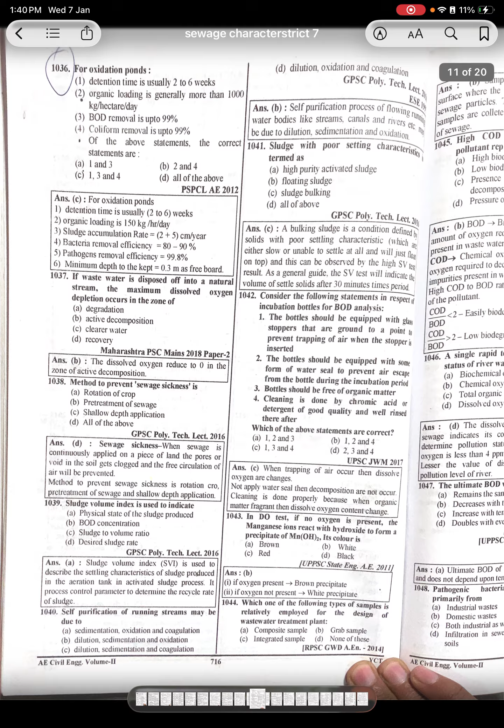Let's talk about the next. For oxidation pond, the detention time is usually 2 to 6 weeks. Organic loading generally more than 1000 kilogram per hectare per day. BOD removal up to 99%. Coliform removal is up to 99%. Which of the above statements is correct?

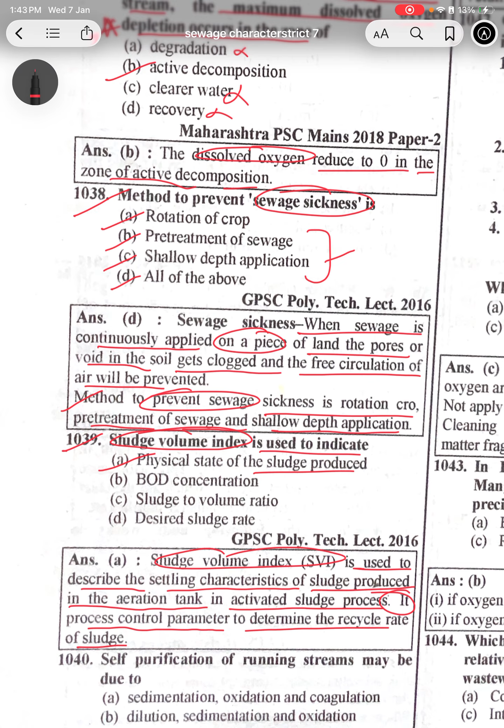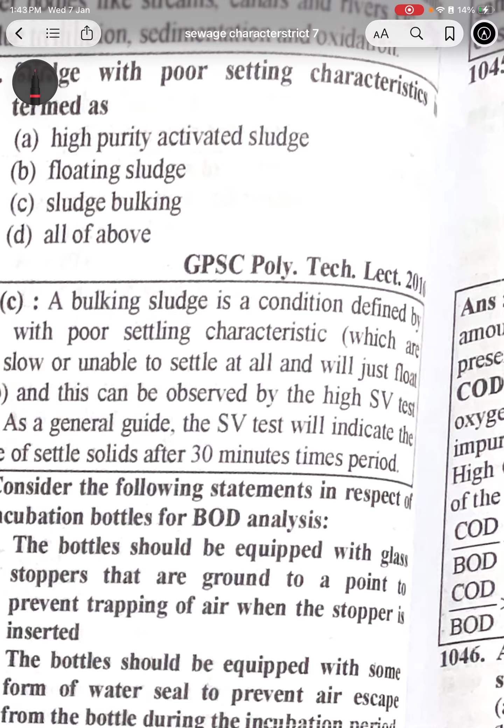Self purification of the running stream may be due to sedimentation, coagulation, and dilution, or dilution, sedimentation and oxidation. So the answer is dilution, sedimentation and oxidation. Self purification process of flowing water bodies like streams, canals, rivers, etc. may be due to dilution, sedimentation and oxidation.

Sludge with poor settling characteristics is termed as sludge bulking. A bulking sludge is a condition defined by solids with poor settling characteristics, which are either slow or unable to settle at all and just float on the top. This can be observed by a high SV test result. As a general guide, the SV test will indicate the volume of the sludge solids after a 30 minute time period.

Let's talk about 1042. Consider the following statements regarding the incubation bottle for BOD analysis. The answer is C. Let's see how. The bottle should be equipped with a glass stopper that is ground to a point to prevent trapping of air when the stopper is inserted. The bottle should be equipped with some form of water seal to prevent air escape from the bottle during the incubation period.

This won't be it. The bottle should be free from organic matter, absolutely right. The cleaning is done by chromic acid or a good quality detergent and well rinsed thereafter. When trapping of air occurs, the dissolved oxygen is changed. If the water seal is not applied, decomposition does not occur properly. Cleaning is done properly because if organic matter is present, the dissolved oxygen content is changed.

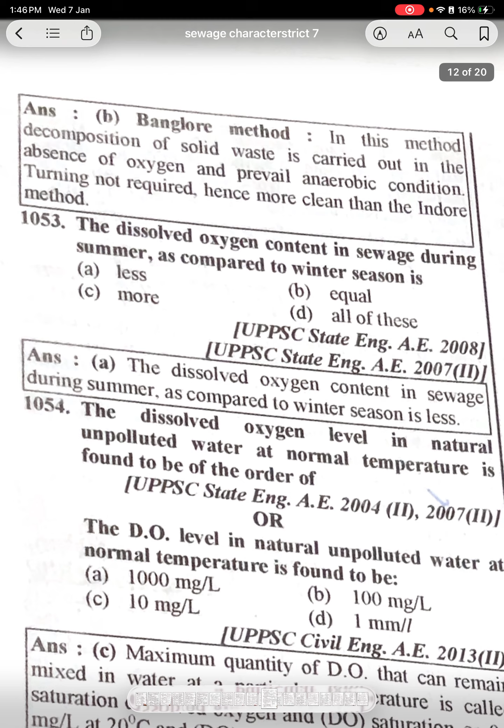Which of the following types of sample is generally employed for the design of a wastewater treatment plant? That is a composite sample. The answer will be composite sample. Let's talk about the Bangalore method. In this method, decomposition of the solid waste is carried out in the absence of oxygen and anaerobic conditions prevail. Turning is not required, hence it is cleaner than the Indore method.

The dissolved oxygen content in sewage during the summer as compared to the winter season is less. The dissolved oxygen level in natural unpolluted water at normal temperature is found to be of the order of 10 mg per liter.

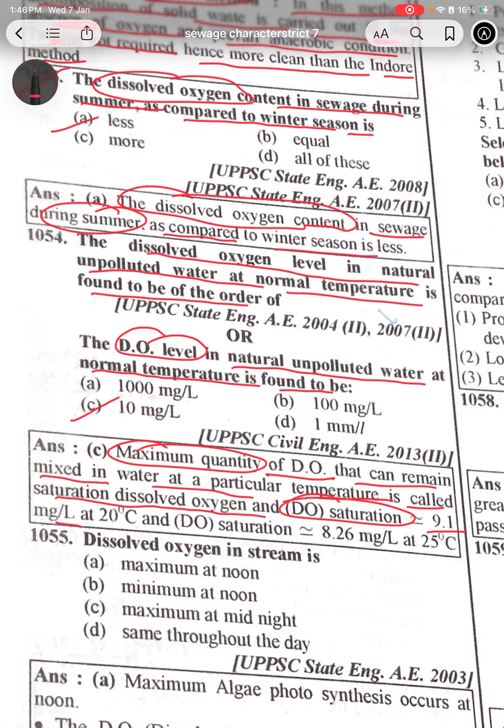The maximum quantity of dissolved oxygen that can remain mixed in water at a particular temperature is called saturation dissolved oxygen. Saturation dissolved oxygen is 9.1 mg per liter at 20 degrees centigrade and 8.26 mg per liter at 25 degrees centigrade. The dissolved oxygen in a stream is maximum at noon.

The maximum algae photosynthesis occurs at noon. The dissolved oxygen content in water is generally determined by the Winkler method, an oxidation-reduction process carried out chemically to liberate an amount of iodine equivalent to the quantity of dissolved oxygen originally present. The maximum quantity of dissolved oxygen that can remain mixed in water at a particular temperature is called saturation dissolved oxygen: 9.1 mg/L at 20°C and 8.26 mg/L at 25°C.

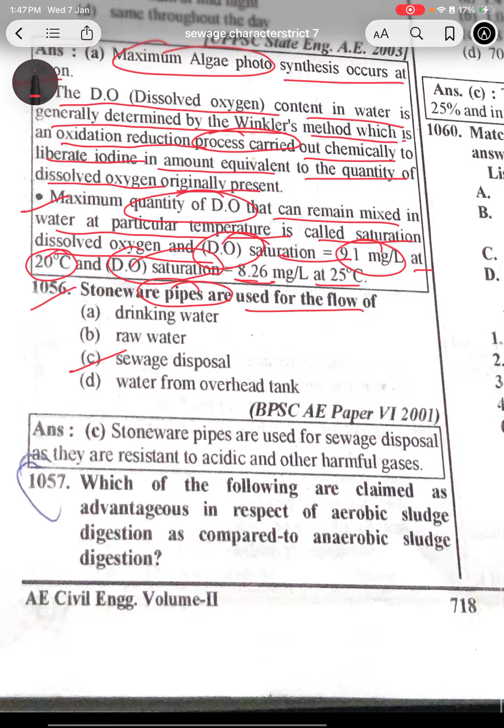Stoneware pipes are used for the flow of sewage disposal, as they resist acid and other harmful gases.

Which of the following chemicals are claimed as advantageous with respect to aerobic sludge digestion compared to anaerobic sludge digestion?

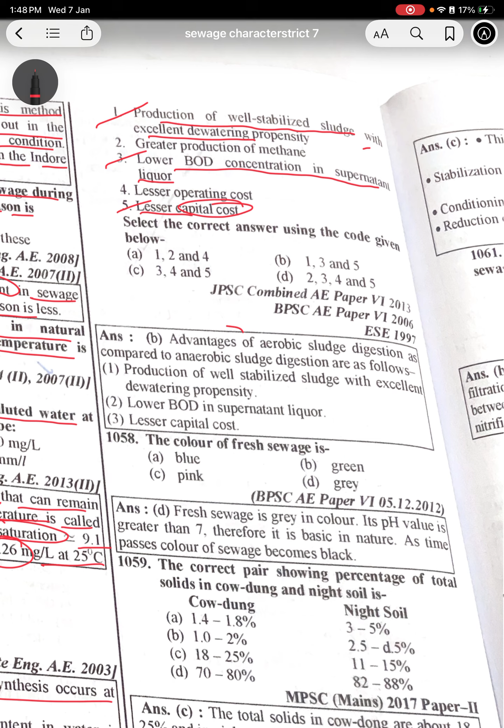Advantages of aerobic sludge digestion as compared to anaerobic sludge digestion are as follows: production of well stabilized sludge with excellent dewatering propensity, lower BOD in supernatant liquor, and lesser capital cost.

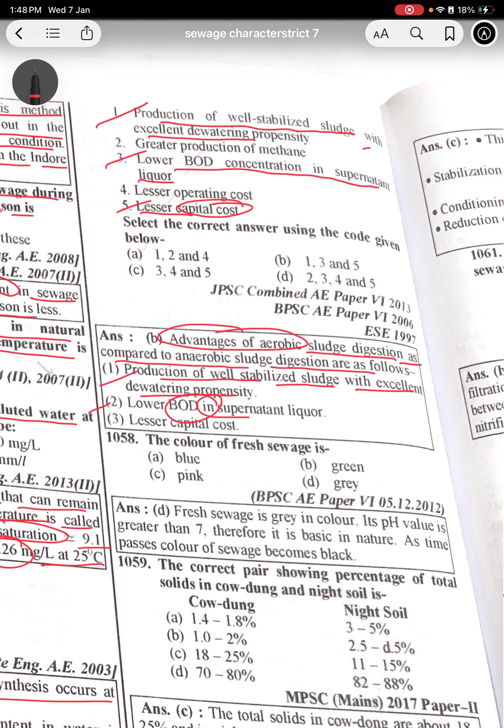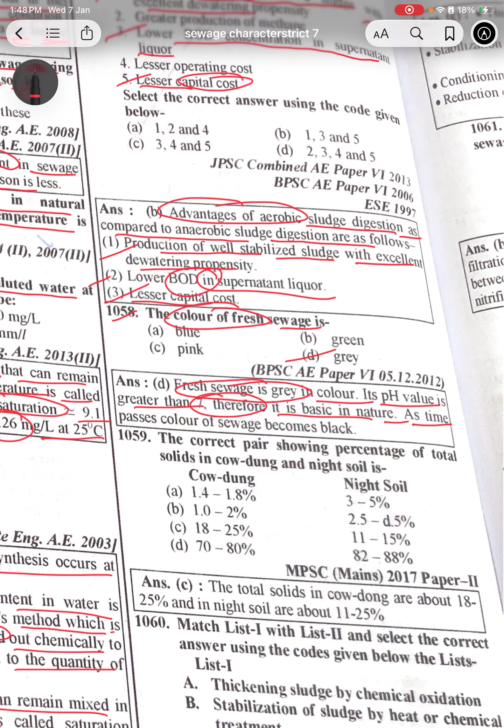The color of fresh sewage is grey, and its pH value is greater than 7, therefore it is basic in nature. As time passes, the sewage becomes black.

The correct pair showing the percentage of total solids in cow dung and night soil: the total solids in cow dung are about 18 to 25%, and in night soil about 11 to 25%.

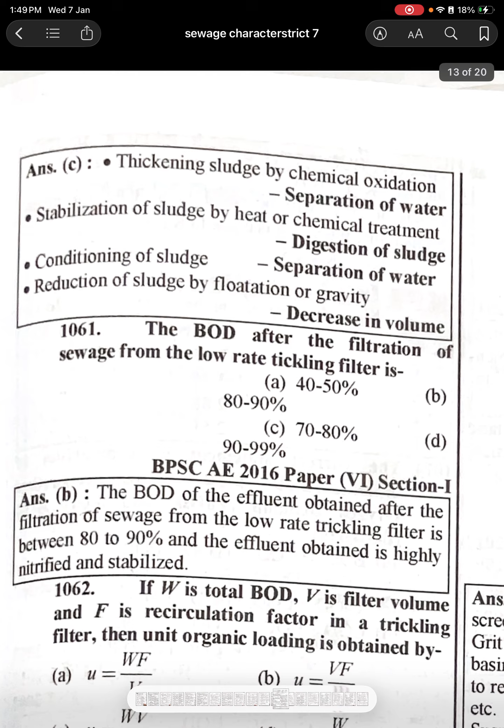Thickening of sludge by chemical oxidation is separation of water. Stabilization of sludge by heat or chemical treatment is digestion of sludge. Conditioning of sludge is separation of water. Reduction of sludge by floatation or gravity is a decrease in volume.

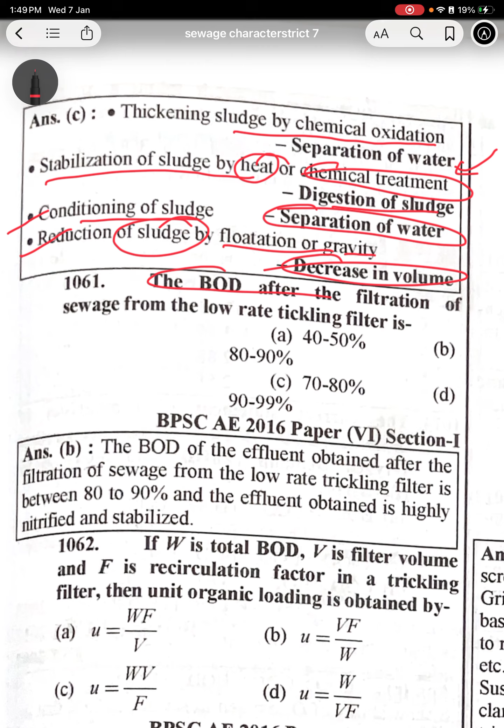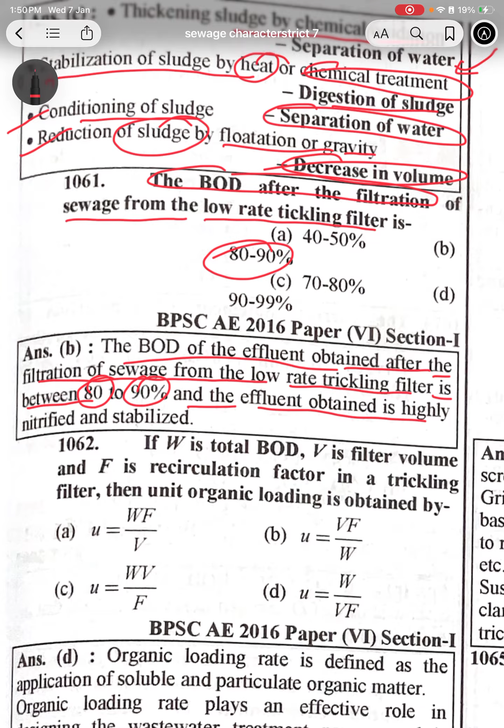The BOD after filtration of sewage from a low rate trickling filter: the answer is 80 to 90%. The BOD of effluent obtained after filtration of sewage from the low rate trickling filter is between 80 to 90%, and the effluent obtained is highly nitrified and stabilized.

If W is the total BOD, V is the filter volume, F is the recirculation factor for the trickling filter, then unit organic loading is obtained by W divided by V into F.

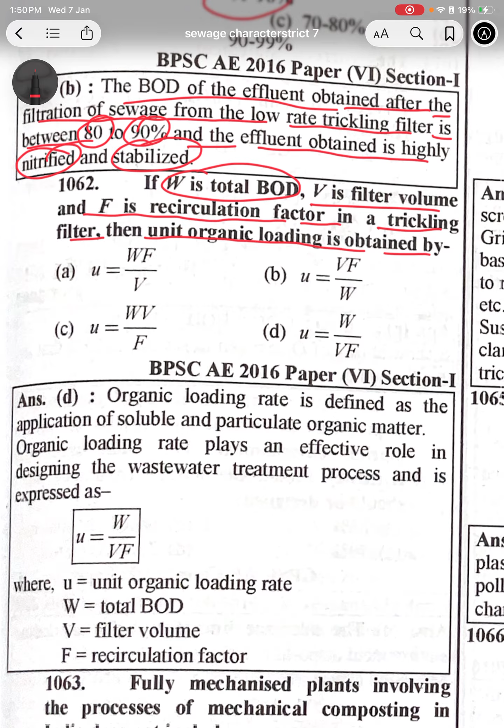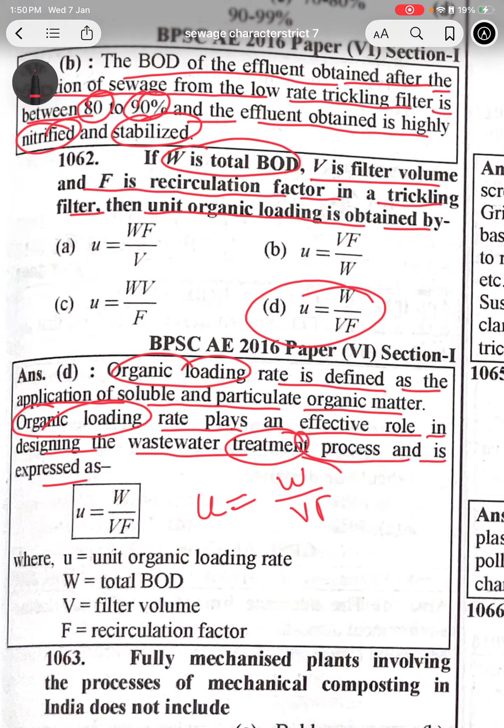Organic loading rate is defined as the application of soluble and particulate organic matter. Organic loading rate plays an effective role in designing the wastewater treatment process and is expressed as U equals W upon V into F, where U is the organic loading rate, W is the total BOD, V is filter volume, and F is the recirculation factor.

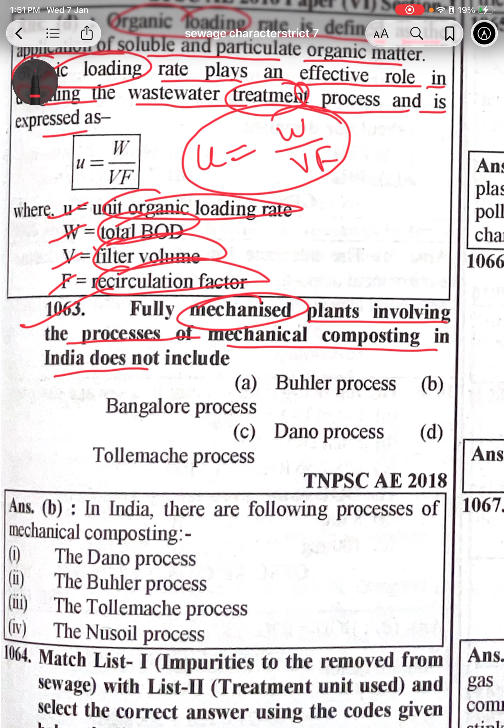The fully mechanized plant involving the process of mechanical composting in India does not include the Bangalore process. In India, the following processes of mechanical composting exist: the Dano process, Buhler process, Tollemache process, and Nusoil process.

Large floating or suspended inorganic matter is removed by screens, grit chambers remove inorganic grit, and the primary clarifier removes suspended organic matter. Large floating matters are removed by the screen. Grit removal basins such as grit chamber or grit channel, and detritus tanks are sedimentation basins placed at the front of the wastewater treatment plant to remove inorganic particles such as sand, gravel, grit, etc. Suspended organic matter is removed in the primary clarifier, and dissolved organic matter is removed in the trickling filter.

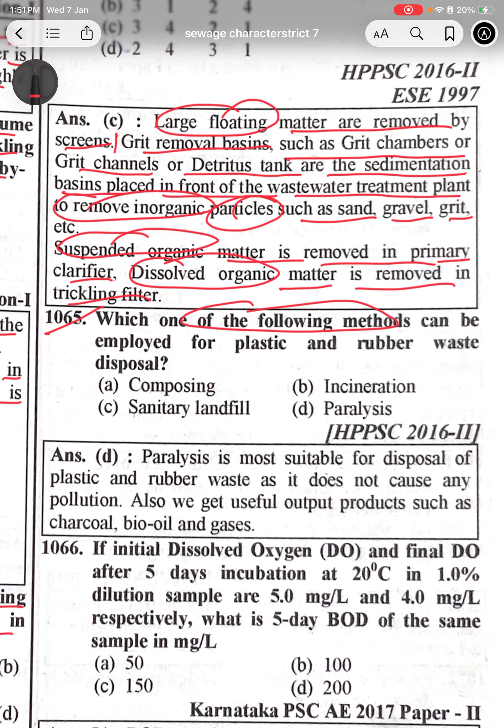Which one of the following methods can be employed for plastic and rubber waste disposal? The answer is pyrolysis. Pyrolysis is the most suitable method for disposal of plastic and rubber waste and does not cause any pollution. It also yields useful output products such as charcoal, bio oil, and gases.

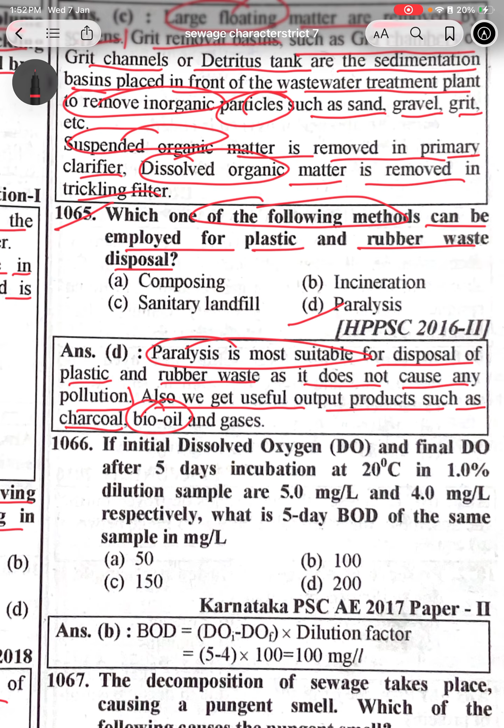If the initial dissolved oxygen and final dissolved oxygen after 5 days incubation at 20 degrees in a 1.0% dilution sample are 5 mg/L and 4 mg/L respectively, what is the 5-day BOD of the sample in mg/L? The answer is 100, obtained by multiplying the initial minus final value by the dilution factor.

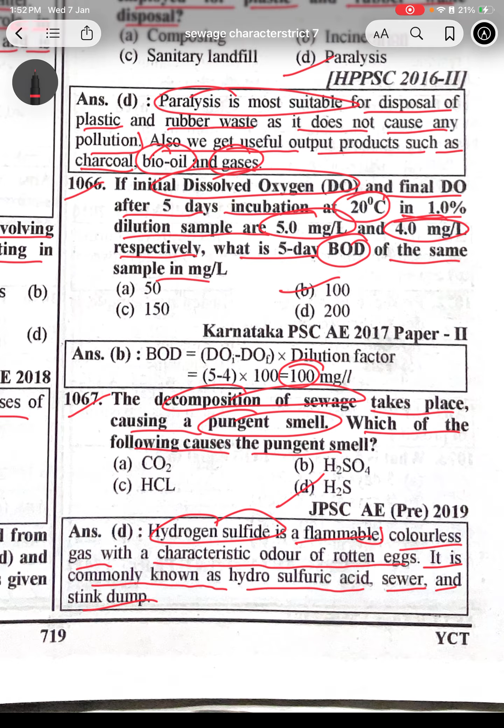The dominating microorganism in an activated sludge process reactor is aerobic heterotrophs. In the activated sludge process, treated sewage from other treatment plants containing microorganisms gets mixed with the sewage in the presence of oxygen to degrade it.

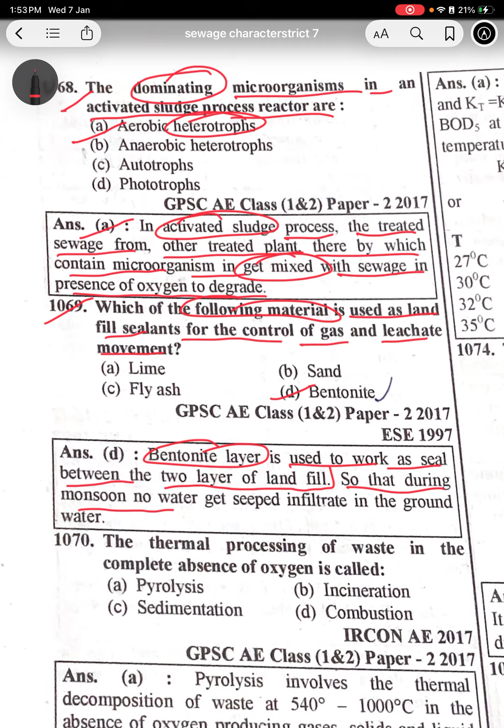Which material is used as a landfill sealant to control gas and leachate movement? That is bentonite. Bentonite layer is used to work as a seal between two layers of landfill, so that during monsoon, no wastewater seepage infiltrates into the groundwater.

The thermal process of waste treatment in the complete absence of oxygen is called pyrolysis. Pyrolysis involves thermal decomposition of waste at 540 to 1000 degrees centigrade in the absence of oxygen, producing gas, solid, and liquid residue, followed by a secondary chamber that normally combusts, resulting in synthesis gases.

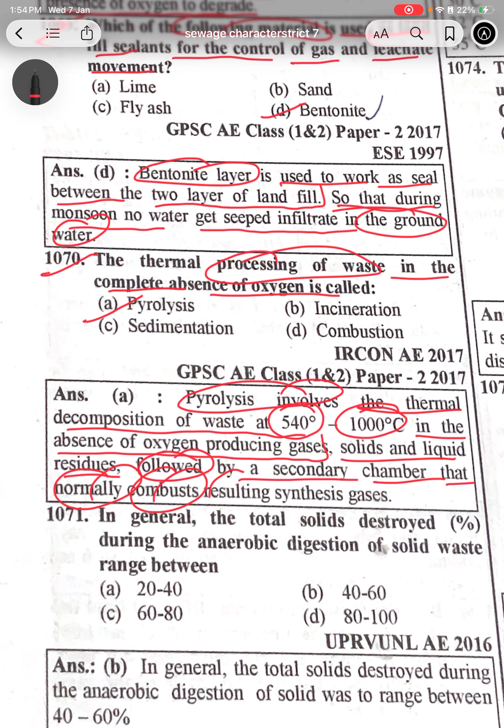In general, the total solid destroyed percentage during anaerobic digestion of solid waste ranges between 40 to 60 percentage.

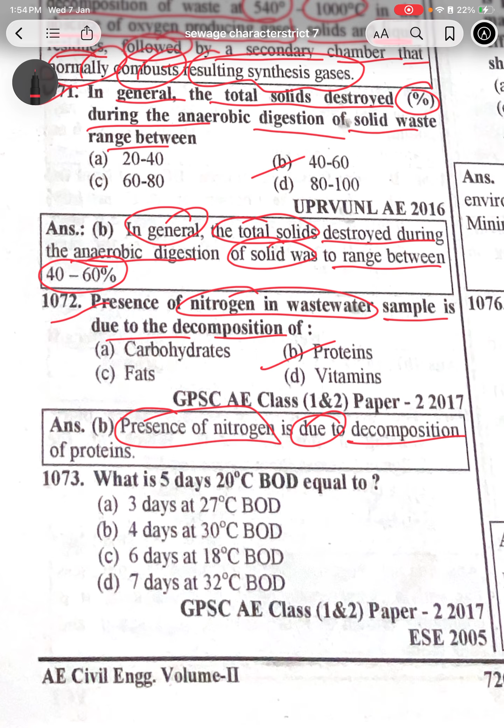Presence of nitrogen in wastewater sample is due to decomposition of the proteins. What is a 5 days at 20 degree BOD equal to? It equals 3 days at 27 degree BOD.

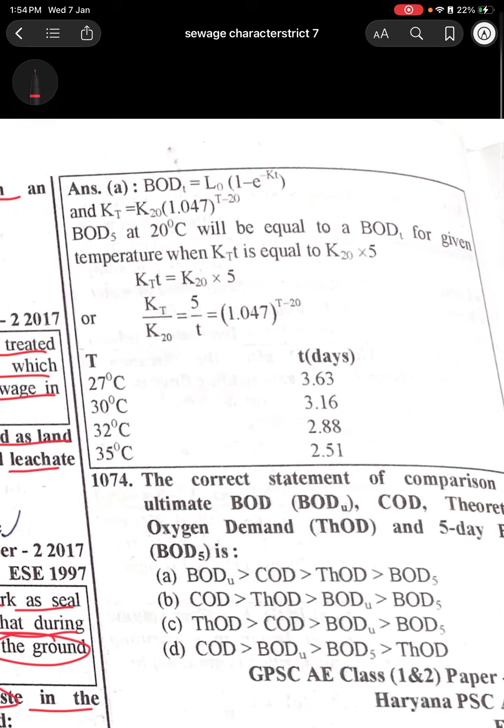BOD का फॉर्मूला ये होता है। अब यहाँ पे temperature और day की बात करें तो 27 पे 3.6 होती है, 30 डिग्री पे 3.16 होती है, 32 पे 2.88 होती है और 35 के ऊपर 2.51 होती है।

The correct statement is the comparison of the BOD, COD, theoretical THOD and 5-day BOD. तो इसमें आ जाएगा, ये नहीं होगा, ये भी नहीं होगा, ये होगा THOD, COD, BOD अल्टीमेट। ये last के दो हैं, ये सबसे कम होते हैं, ये ज़्यादा होते हैं। ठीक है, तो आप कैसे याद रखना?

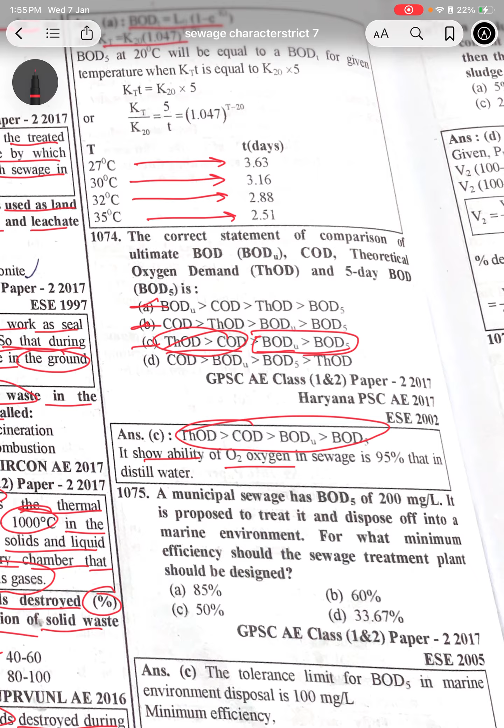It's solubility of oxygen in sewage 95% in the distilled water. The municipal sewage has BOD 5 days of 200 milligram per liter. It is proposed to treat and dispose of into a marine environment. For what minimum efficiency should sewage treatment plants be designed? That is 50%.

कैसे हुआ बताते हैं। The tolerance limit of BOD5 in marine environment disposal is 100 milligram per liter। एफिशिएंसी की बात करते हैं तो कैसे होगा 200 माइनस 100 डिवाइड बाई 200 इंटू 100 जैसे 50%।

Dispose of into the marine environment, but what minimum efficiency should sewage treatment plants be designed for.

The following data pertains to a sewage sample. The BOD of a given sewage sample is D. Dilution factor 800. Initial minus final, divide करेंगे तो ये आ जाएगा आपका ऐसे initial minus final into dilution factor.

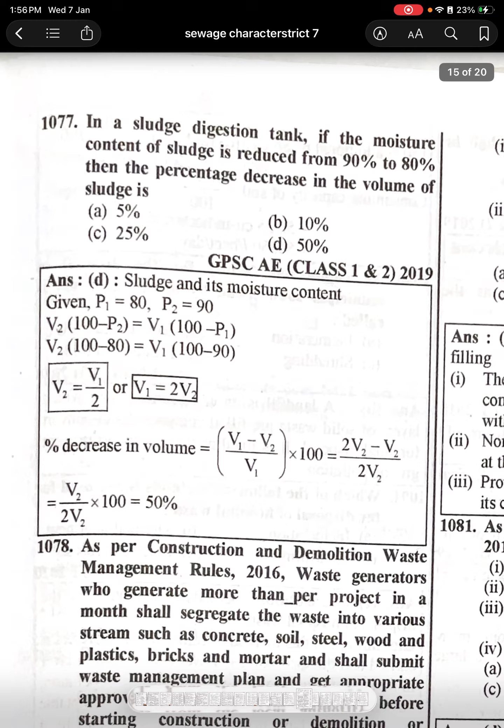In a sludge digestion tank, if the moisture content of the sludge reduces 90% to 80%, the percentage decrease in volume of the sludge is - percentage decrease in volume of the sludge and its moisture content का relation जो जो आपका दे रखा P1 बराबर 80 दे रखा है, P2 बराबर 90 दे रखा है, तो इसकी इक्वेशन होती है V2(100 - P2) = V1(100 - P1)।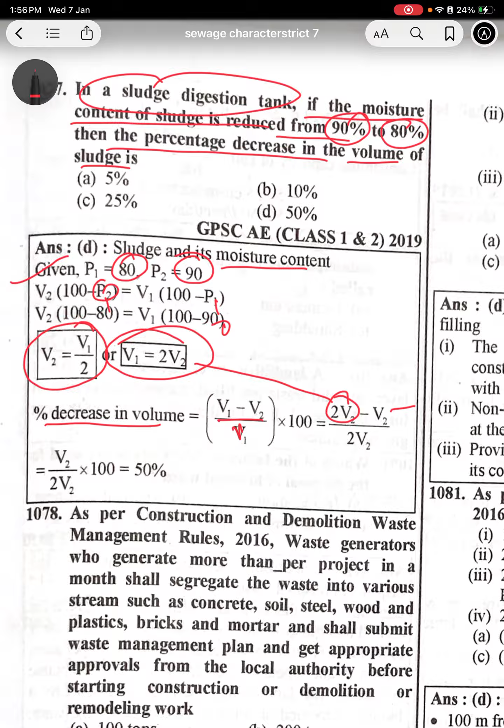ठीक है, तो इसमें अब P1 की वैल्यू पुट करेंगे 80 या P2 की वैल्यू 90 पुट करेंगे। V1 माइनस V2 होता है, V1 बराबर 2V2। percentage decrease volume बराबर V1 माइनस V2 डिवाइड बाई V1 इंटू 100। तो V1 की जगह हम 2V2 पुट कर देंगे यहाँ से, और ये वैल्यू करके यहाँ पे हम वैल्यू करेंगे तो ये 50% आ जाएगा।

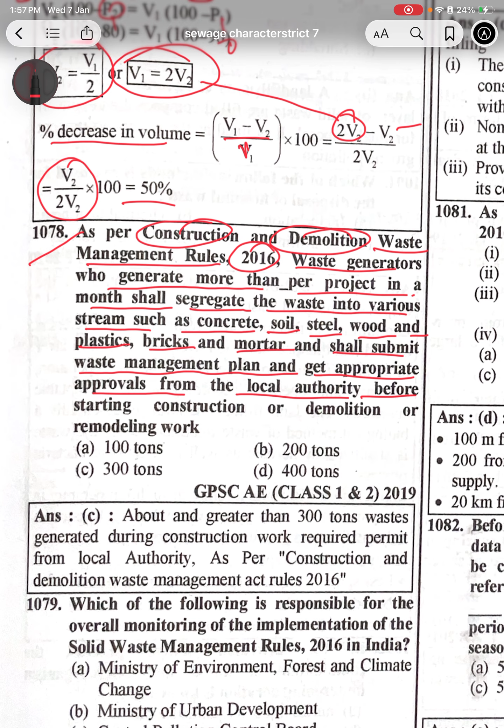चलते हैं next। As per the Construction and Demolition Waste Management Rule 2016, the waste generators who generate more than per project in a month shall segregate the waste into various streams such as concrete, soil, steel, wood and plastic, bricks, mortar, and shall submit waste management plan to get appropriate approval from the local authority before starting construction or demolition or remodeling work, that is 300 ton - above and greater than 300 ton waste generated during the construction required permit from local authority as per Construction and Demolition Waste Management Act 2016।

Which one of the following is responsible for the overall monitoring of the implementation of the Solid Waste Management Rule 2016 in India? That's the Ministry of Environment, Forest and Climate Change - Solid Waste Management, Ministry of Environment, Forest and Climate Change.

In order to prevent pollution from landfill operation, which following provisions are supposed to be made? The stormwater drain shall be designed and constructed in such a way that surface runoff water is diverted from the landfilling sites। ये बिल्कुल नहीं होगा रे। The non-permeable lining

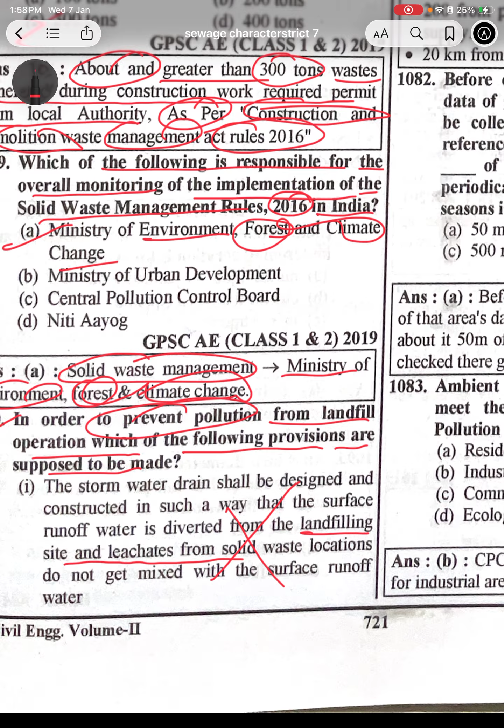नहीं गलत नहीं है, सही है। Diverted from the landfill site and leachate from the solid waste location does not get mixed with the surface - ये सही होगा।

Non-permeable lining system should be provided at the base and wall of the waste disposal area. Provision of the management of the leachate including collection and treatment shall be made। तो इसमें D होगा।

In order to prevent pollution from landfilling, the stormwater drain should be designed and constructed in such a way that it cannot be mixed with surface runoff water. Non-permeable lining system should be provided at the base and wall of the waste disposal area. Provision of management of leachate including collection and treatment shall be made.

As per Solid Waste Management Rules 2016, landfill sites shall be 100 meters away from the river, 200 meters from the pond, 200 meters from the highway, habitations, public parks and water supply sources, and 20 kilometers from the airport and airways.

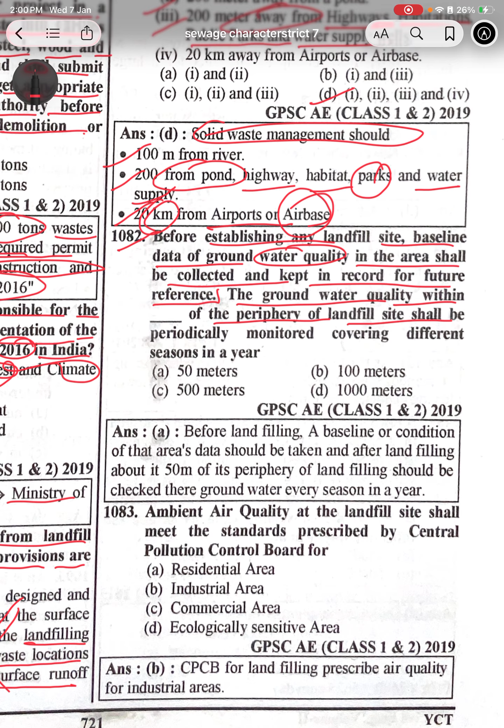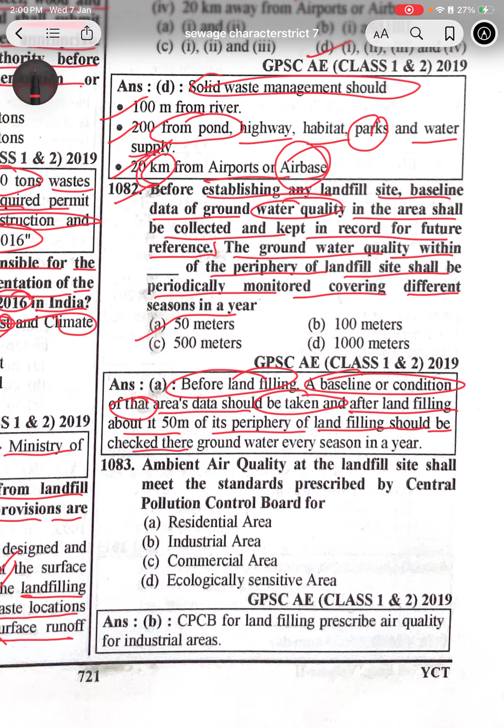Before establishing any landfill site, baseline data on groundwater quality within 50 meters of the periphery shall be collected and recorded for future reference, and monitored periodically covering different seasons of the year.

Ambient air quality at the landfill site shall meet the standards prescribed by the Central Pollution Control Board, which is category B for industrial areas.

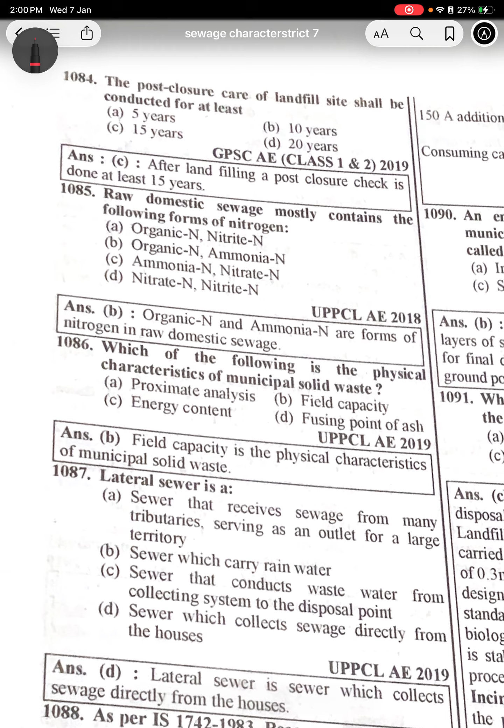Post-closure monitoring of landfill sites shall be conducted for leachate for 15 years after landfilling is completed.

Raw domestic sewage mostly contains nitrogen in the form of organic nitrogen and ammonia nitrogen.

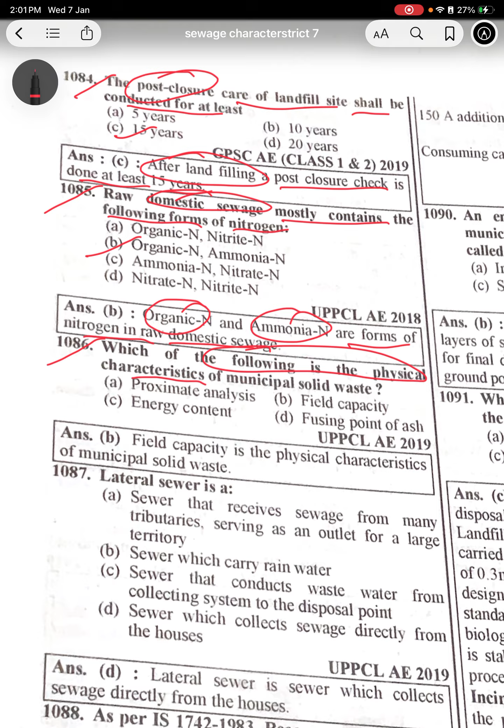Field capacity is one of the physical characteristics of municipal solid waste.

A lateral sewer is a sewer which collects sewage directly from the houses.

As per IS 1742-1983, the recommended spacing of manholes in straight reaches depends on the size of sewer: for sewers having diameter up to 0.6 meters, the spacing is 75 meters.

A town disposes of its sewage by the land treatment process on 150 hectares with 50% of the area designated for rotation. If the rate of water supply is 150 liters per day and 75% of water is converted into sewage, the consuming capacity of the soil needs to be calculated.

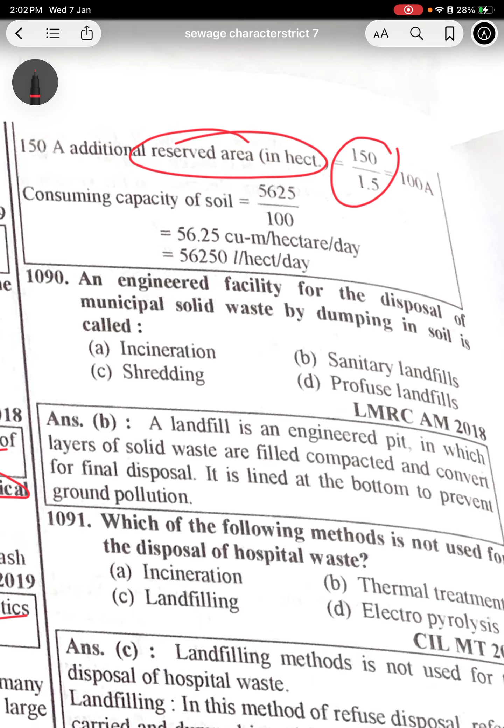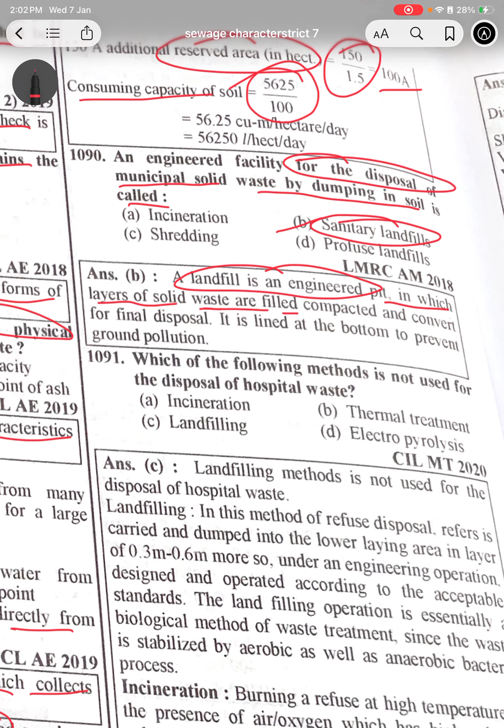An engineered facility for the disposal of municipal solid waste by dumping in the soil is called a sanitary landfill. A landfill is an engineered pit in which layers of solid waste are filled, compacted, and converted for final disposal. It is lined at the bottom to prevent ground pollution.

Landfilling is not a method used for the disposal of hospital waste.

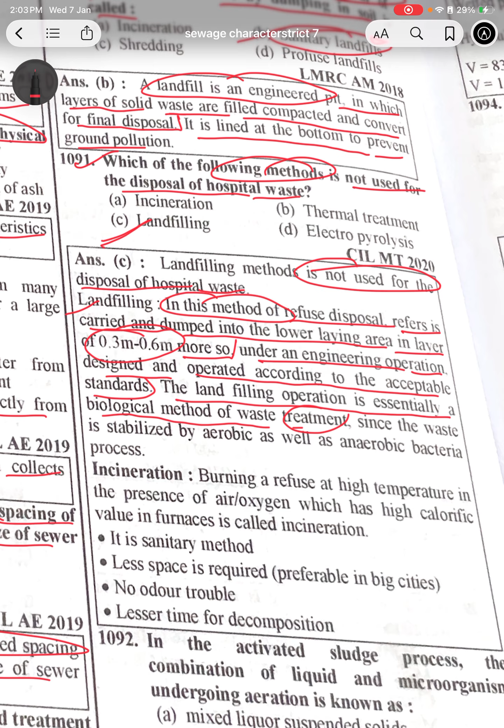In the landfilling method, refuse is carried and dumped into low-lying areas in layers of 0.3 to 0.6 meters under engineering operation, designed and operated according to acceptable standards. The landfilling operation is essentially a biological treatment method, since the waste is stabilized by both aerobic and anaerobic bacterial processes.

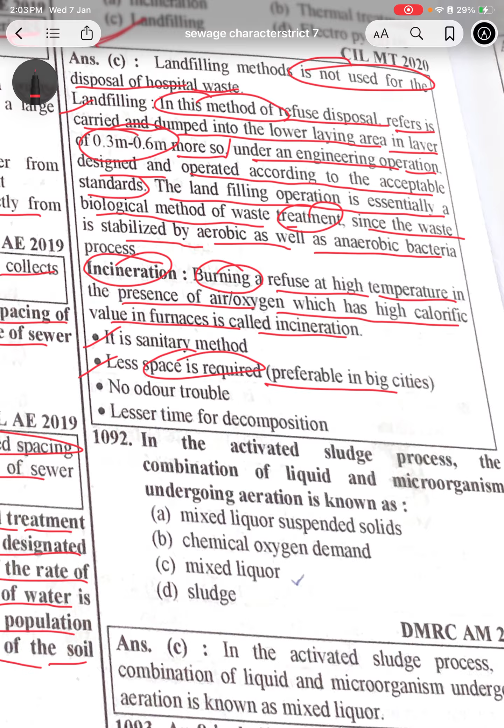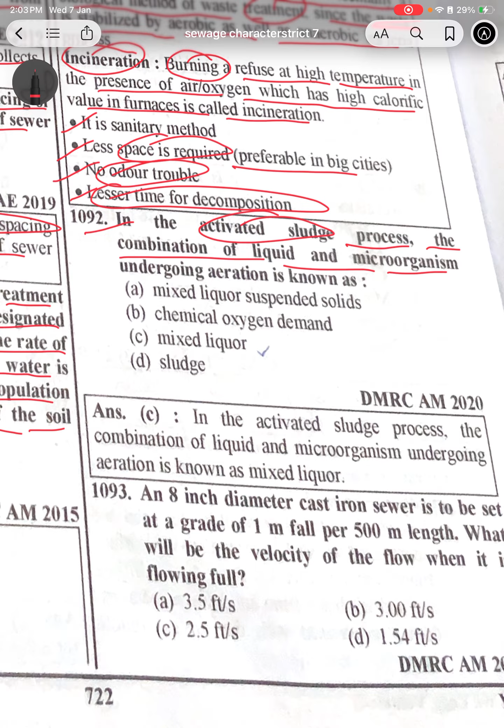In the activated sludge process, the combination of liquid and microorganisms undergoing aeration is known as mixed liquor.

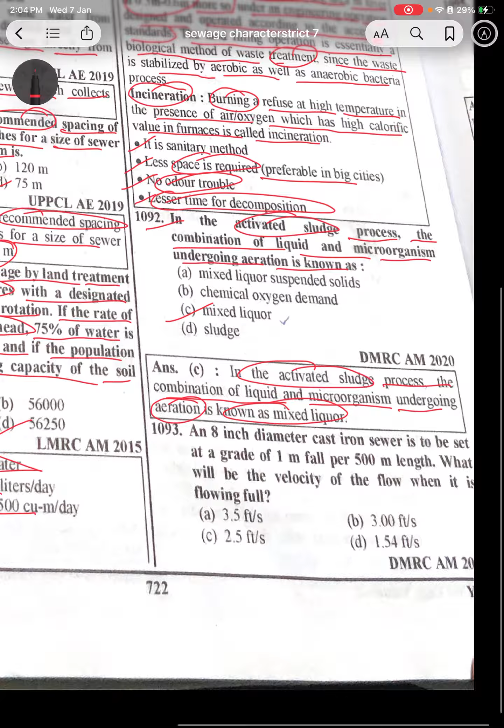An 8-inch diameter cast iron sewer is to be set at a grade of 1 meter fall over 500 meters length. What will be the velocity of flow when it is flowing full?

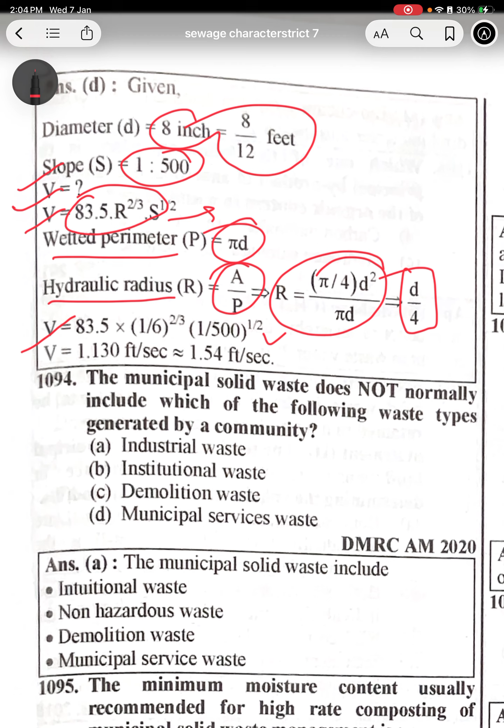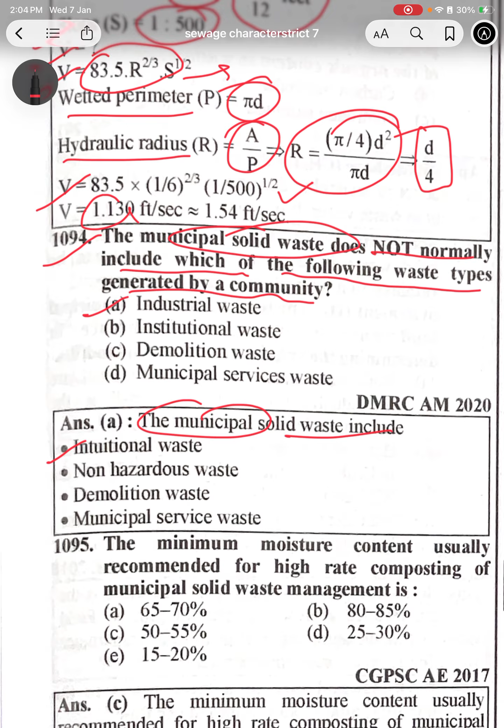Municipal solid waste does not normally include industrial waste generated by communities. Municipal solid waste includes institutional waste, non-hazardous waste, demolition waste, and municipal service waste.

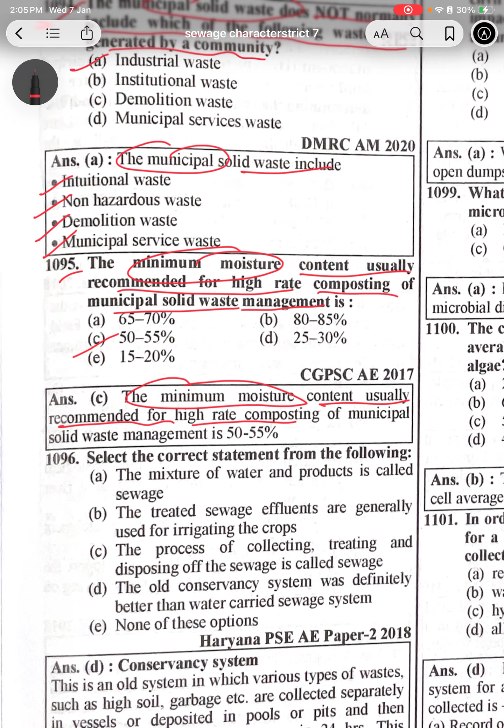The minimum moisture content usually recommended for high rate composting of municipal solid waste management is 50 to 55%.

Select the correct statement from the followings: the old conservancy system was definitely better than the water-carried sewage system.

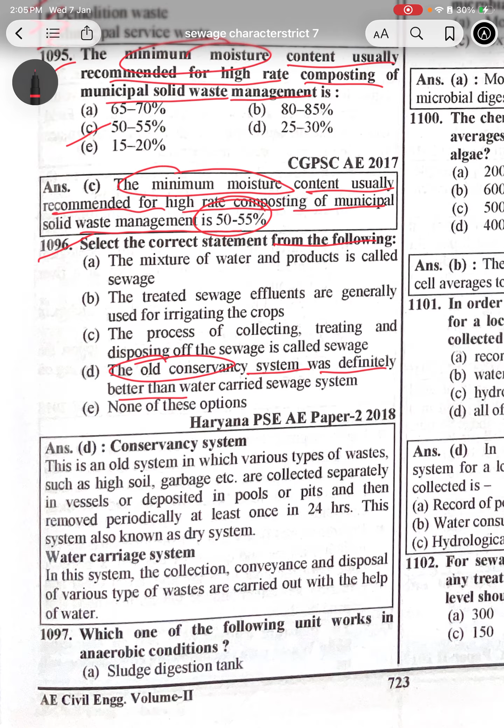The conservancy system is an old system in which various types of waste, night soil and garbage, are collected separately in vessels or deposited in pools and pits, then removed periodically, at least once in 24 hours. This system is known as the dry system.

In a water carriage system, the collection, conveyance, and disposal of various types of waste is carried out with the help of water.

Which of the following units work in anaerobic conditions? The answer is the sludge digestion tank.

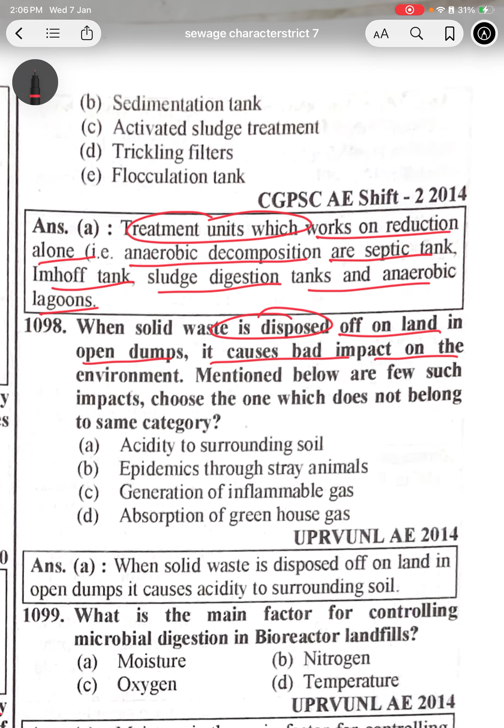Treatment units which work on anaerobic decomposition are septic tank, Imhoff tank, sludge digestion tank, and anaerobic lagoons. When solid waste is disposed of on land in open dumps, it causes bad impacts on the environment. Mentioned below are a few such impacts. Choose the one which does not belong to the same category.

Acidity to surrounding soil. When solid waste is disposed of on land in open dumps, it causes bad impacts on the environment. Mentioned below are a few such impacts. Choose the one which does not belong to the same category. When solid waste is disposed of on land in open dumps, it causes acidity in the surrounding soil.

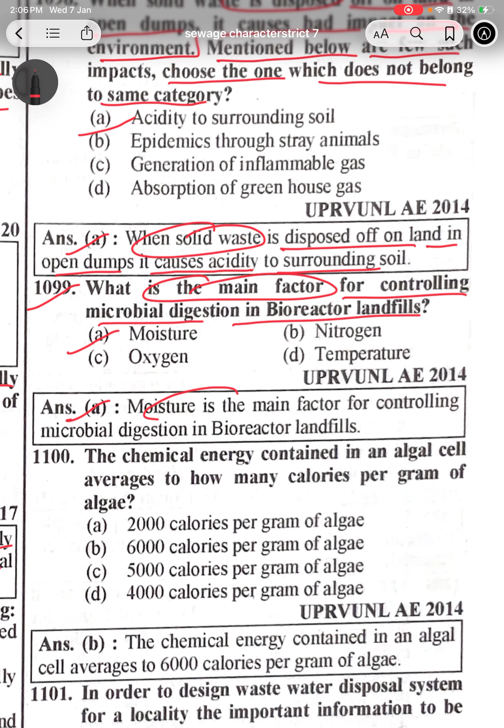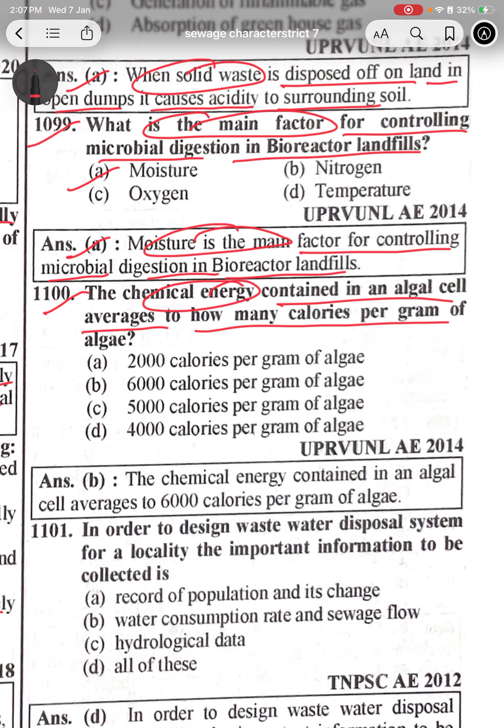What is the main factor controlling microbial digestion in bioreactor landfills? That is moisture. Moisture is the main factor controlling microbial digestion in bioreactors of the landfill. The chemical energy contained in an algal cell averages how many calories per gram of algae? That is B, 6000 calories per gram of algae. The chemical energy contained in the algal cell averages 6000 calories per gram of algae.

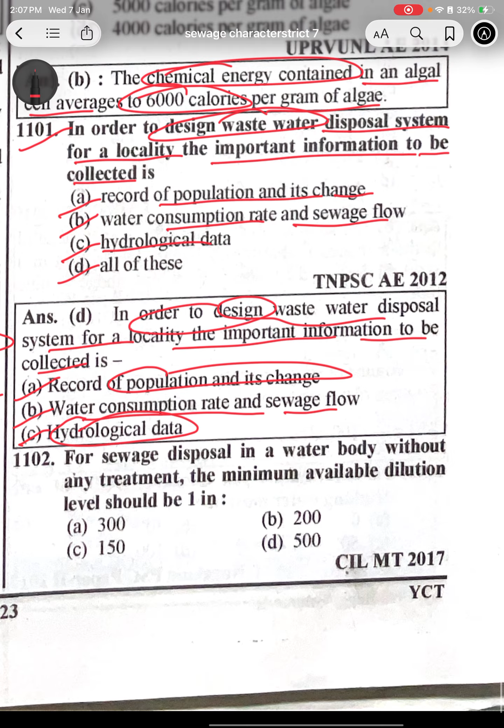In order to design a wastewater disposal system, which important local information is to be collected? That is D: record of the population and its changes, water consumption and sewage flow, hydrological data. For sewage disposal in water bodies without any treatment, the minimum available dilution level should be 1 in 500.

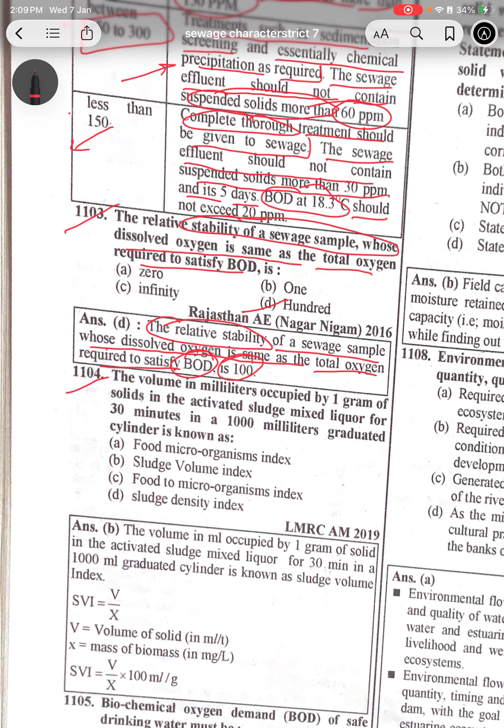The relative stability of a sewage sample whose dissolved oxygen is the same as the total oxygen required to satisfy the BOD. The relative stability of the sewage sample whose dissolved oxygen is the same as the total oxygen required to satisfy BOD is 100.

The volume in milliliters occupied by 1 gram of solids in activated sludge mixed liquor after settling for 30 minutes in a 1000 milliliter graduated cylinder is known as the sludge volume index. SVI is V upon X: volume of solids and mass of biomass. SVI is V upon X into 100.

Biochemical oxygen demand, BOD, of safe drinking water is 0. BOD for safe drinking water must be 0. Which gas is the principal byproduct of the organic content of wastewater? That is methane. Methane, CH4, is the principal byproduct of anaerobic decomposition of the organic content in wastewater. It is around 60%.

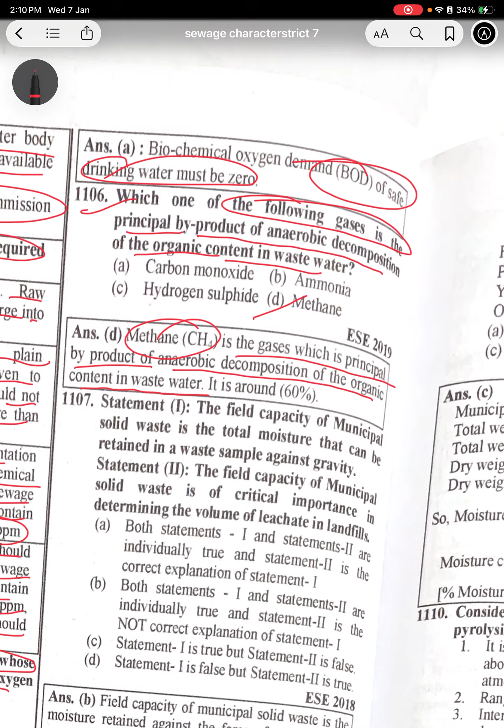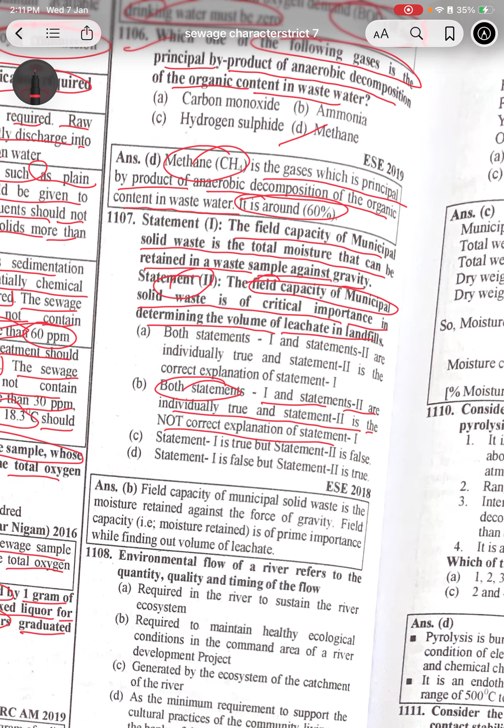That is B. Both statements are individually true but one is not the correct explanation of the other. The field capacity of municipal solid waste is the total moisture that can be retained in the waste sample against gravity. The field capacity of municipal solid waste is of critical importance in determining the volume of leachate in landfill. Field capacity is of prime importance while finding the volume of leachate.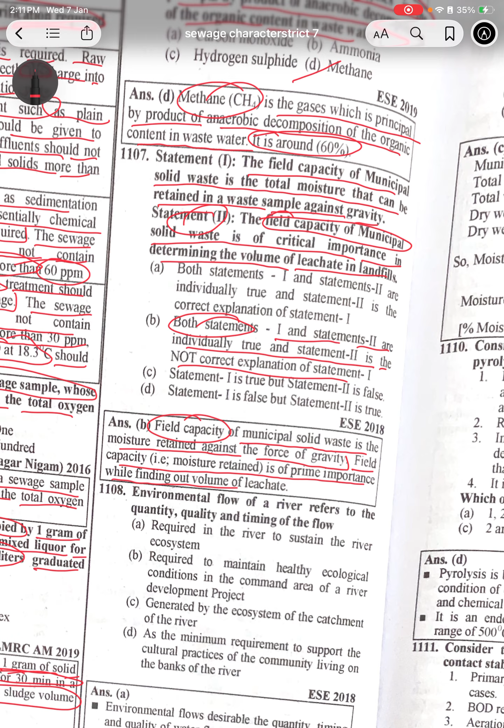Environmental flow of a river refers to the quantity, quality and timing of the flow required to sustain the river ecosystem, required to maintain healthy ecological conditions in the command area of a river development project, generated by the ecosystem of the catchment, or the minimum requirement to support the cultural practices of the community living on the bank of the river. The environmental flow will be the first option.

Environmental flow describes the quantity, timing and quality of water flow required to sustain freshwater and estuarine ecosystems and the human livelihoods and well-being that depend upon them. Environmental flow is a system of managing the quantity, timing and quality of water flow below a dam, with the goal of sustaining freshwater and estuarine ecosystems and the human livelihoods that depend on them.

Required to maintain healthy ecological condition. Ecology generates the ecosystem. Maintain requirement of supporting the cultural practice.

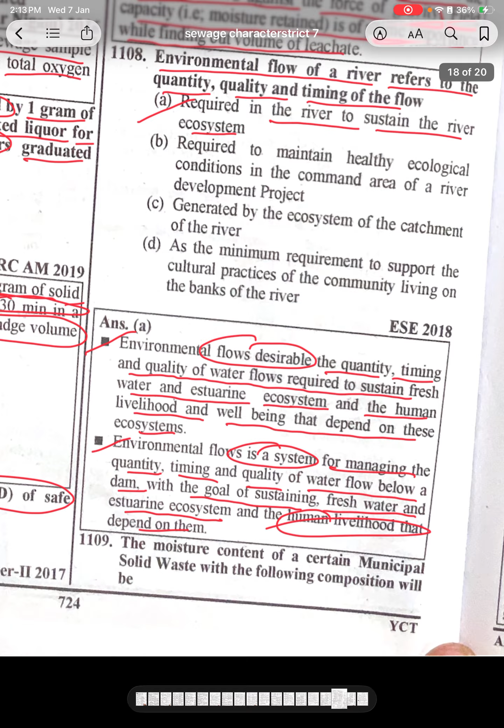The moisture content of the certain municipal solid waste with the following compositions will be

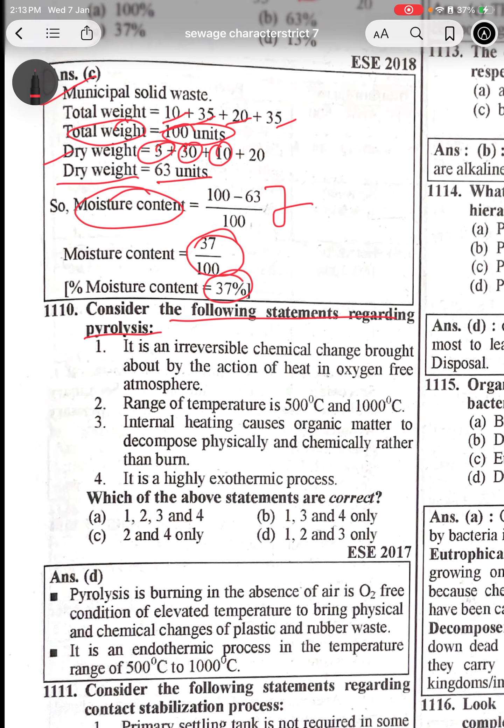Consider the following statement regarding pyrolysis. It is an irreversible chemical change brought about by the action of heat in an oxygen-free atmosphere. ठीक है, तो ये भी सही होगा. The range of temperature 500 degree to

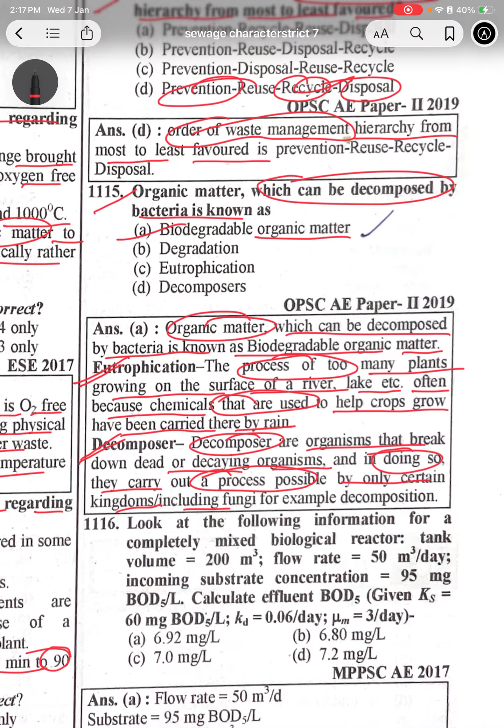Help crops grow, have been carried out by the rain. The decomposers are organisms that break down dead, decaying organisms, and in doing so they carry out the process of decomposition, by only certain kingdoms including fungi. Look at the following information for the completely mixed biological reactor. Tank volume 200 meter cube, flow rate 50 meter cube per day, and incoming substrate concentration is 95 milligram. इनको आपको सॉल्व करना होगा, मैं बता दूंगा कैसे सॉल्व करना है।

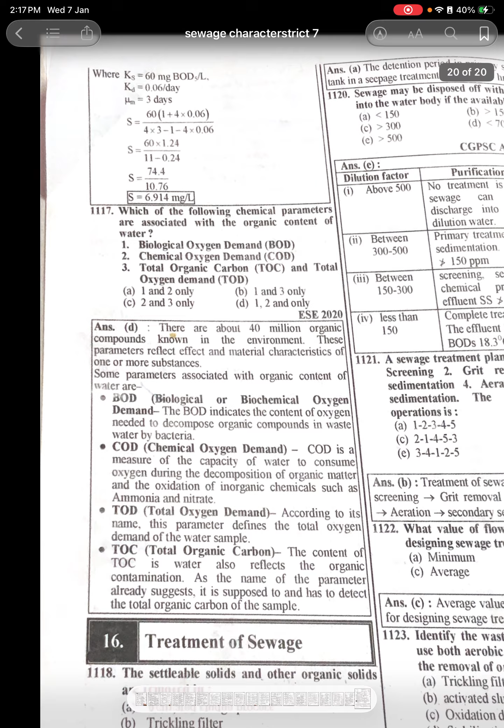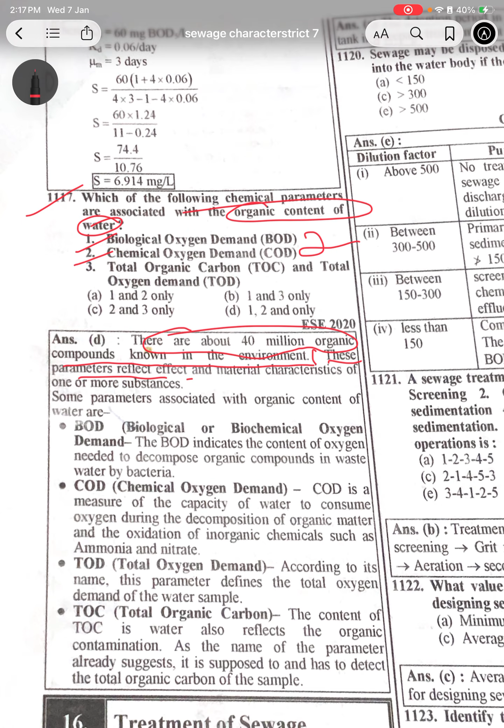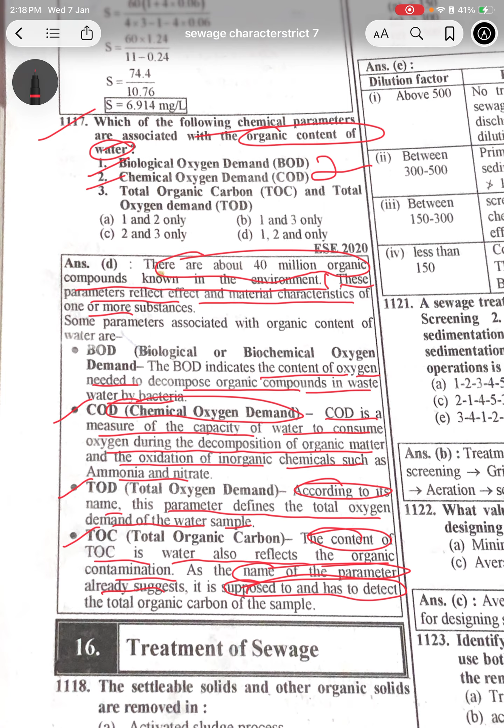BOD indicates the content of oxygen needed to decompose organic compounds in wastewater by bacteria. COD is a measure of the capacity of water to consume oxygen during the decomposition of organic matter and the oxidation of inorganic chemicals such as ammonia and nitrate. TOD, according to the name, defines the total oxygen demand of the water sample. The TOC content of a water sample reflects the organic contamination; as the name suggests, it detects the total organic carbon of the sample. नेक्स्ट आप ट्रीटमेंट ऑफ सीवेज पढ़ेंगे। ये ख़त्म हो गया।